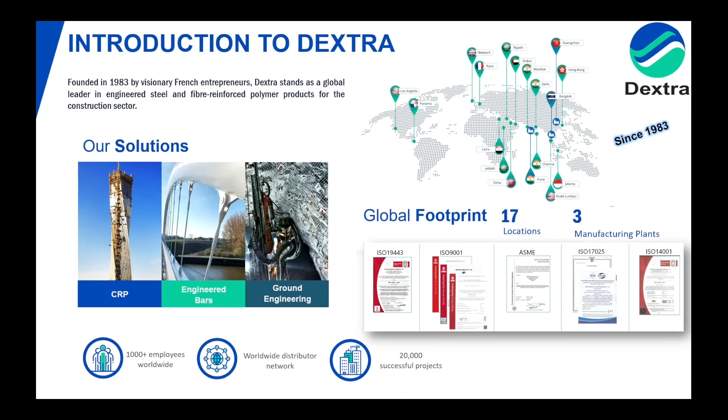years. And the reason I'm saying that steel is not the enemy is also because we manufacture steel products, right? I would be lying if I didn't say so. So yes, we manufacture in China, we manufacture in India. And also one of the misconceptions is that products that are made in Asia are low quality, you can't trust them.

That's not true. We all know now that in Asia, the level of automation in some factories is way beyond what you can find in North America, but vice versa, you find low quality products. So let's get those prejudices out of the way. I will not be using imperial units during this presentation, and I hope that's okay. So I'll be talking about meters and square meters and square kilometers.

So this is 8 million linear meters of FRP produced in China, 3.4 million in India. That was for last year. So one of the mistakes, I think, and we are guilty, as I mentioned this morning with Richard, is that when we initially promoted GFRP as Dextra, we promoted it as something that is temporary, can be cut, and can be disposed of fairly easily. And now we're trying to say that it's the best thing for bridges. So we have to adapt our dialogue a little bit.

The reason is, our first application for GFRP was in the tunneling industry. I don't know how many of you are familiar with the tunneling industry. But when a big machine goes into a station box, breaking in or breaking out, it's going through steel. That's not the way the machine was designed. So this was making people lose quite a bit of time on their project because they had to cut the reinforcement within the concrete before the tunneling machine could break out. So that's not very practical.

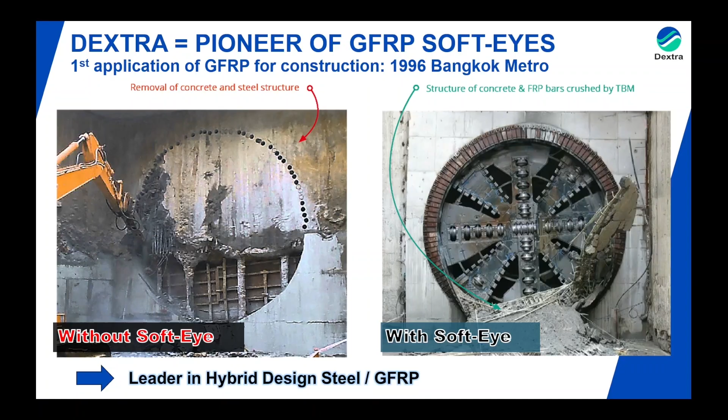Okay, so this is just the way we did it originally, and I'm sorry it's not directly for slabs, but you'll get your slabs later, I promise. The other thing is that we are now using GFRP for additional geotechnical applications. In the geotechnical world, in mining, it's used very commonly, and now we have been using it also with tiebacks, which can be an issue in some cities, having steel strand staying in the ground after the project is completed, and then a micro-tunneling machine or a piling rig arrives, and then it's a disaster.

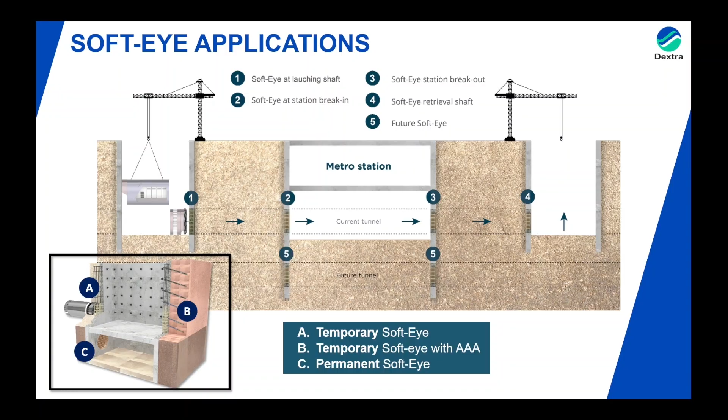And then the liability, and everyone starts pointing fingers at each other. So once again, GFRP can be used for many different things. Okay, we're going to be talking about slabs.

So I am not a slab structural engineer. I got my master's 22 years ago, and I haven't calculated a slab in 22 years. So please, no difficult questions about that.

But before that, okay, so we've seen a lot of comparison GFRP versus steel. So GFRP is not stronger than steel. GFRP has different properties. It has higher tensile strength, but we know that shear forces can be an issue. In seismic environment, we know that given its brittle and non-ductile properties, we cannot be using it there.

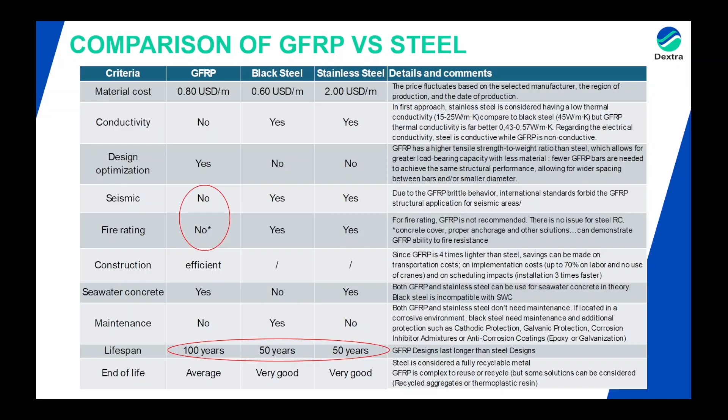manufacturing sheds. But this is a very big push for the Kingdom of Saudi Arabia to get more and more tech companies, to get energy, to get greener, to get a lot of people coming, and they're building using GFRP for the reason I'm going to be highlighting later.

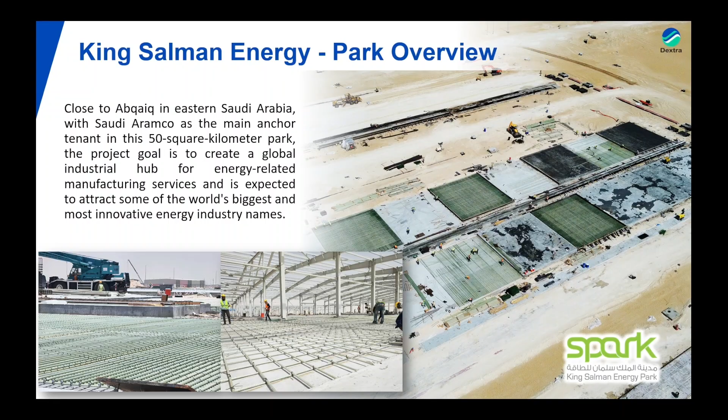So when we say change is painful. Whenever we want to convince an owner, we usually have to convince about 9, 10 people, depending on how many engineers are on the site, and it only takes one person to say no for things to go to waste. So we have to make sure that we talk the language of every different stakeholder to make sure they understand the advantages of the product, and not saying, "Oh, it's greener." No, I mean that's what is interesting for you, and how I'm going to push for it.

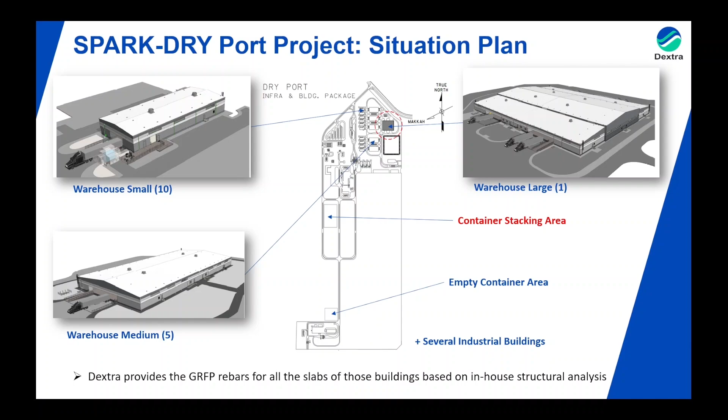So these were the different areas of the project. So most of the areas were within, like in warehouses, and so the loads were not that high, but there was a big area that was outside. The container stacking area where big forklifts and a crane on rails would be installed. So originally the design was with epoxy coated rebar, grade 80, and you can see the loads applied to this slab.

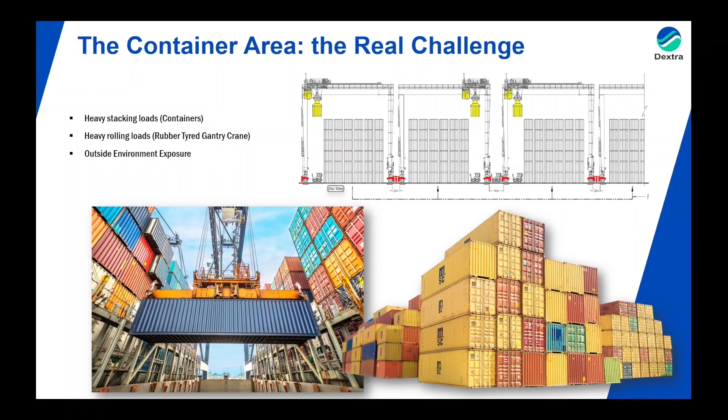So this is, I don't know who, Jim this morning was saying, is this a structural slab? Yes, this is a structural slab. I'm going to be talking about what we did to convince the client.

So the first thing is that we were involved very early on with the owner to talk about how much would it cost the owner to maintain the project once the contractor is gone. And that's something that the contractor doesn't care about, or the engineer doesn't care about that much, but the owner cares about it a lot. So having this conversation very early on with the owner would pave the way for the owner to push the engineer, and the engineer to push the contractor or work with the contractor.

So the owner is a key component of this, because this speaks to the owner. Like, in how many years would I have to maintain, and what type of maintenance would I have to do?

In lead time, in that case, well, we produce 3 million linear meters in a little over 4 weeks, plus shipping from China. So that's a lot. That's a lot of production. We actually set up a factory now in Saudi Arabia. Once again, with steel, you might not have availability of the product. In that case, one of the advantages is that you can build a pultrusion line relatively easily.

Don't look at me like this, Bernard.

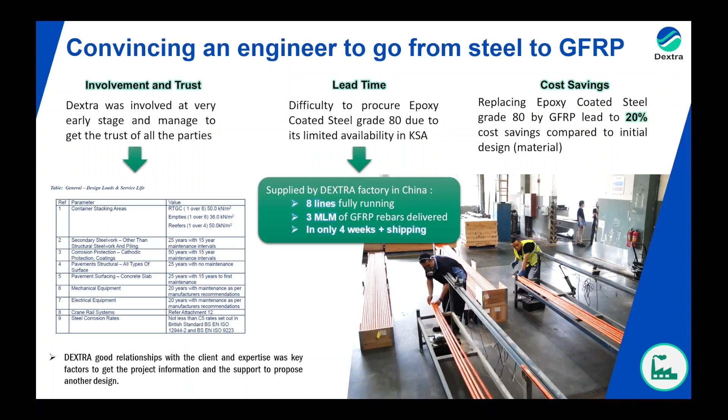Compared to a steel mill. Again, in terms of cost savings, and I'm just talking about the pure material cost savings, that doesn't factor in the labor saving that we've been discussing today. Roughly, this was the overall saving. Once again, it's not a one-to-one saving. Obviously, you'll see later the amount of GFRP rebar and the case studies and the load cases, so it's not something that you can take and say, I'm going to save 20%. It's project by project.

Criteria. So we played a lot with, you said rainbow colors, you like rainbow colors. We also like to play with rainbow colors. You can't imagine on a container stacking area how many load cases you can have, depending on where the forklift is, where he's stacking the container, and where he is at any given time. So thankfully, computers and not manual calculation are now available. So we made our own finite element analysis.

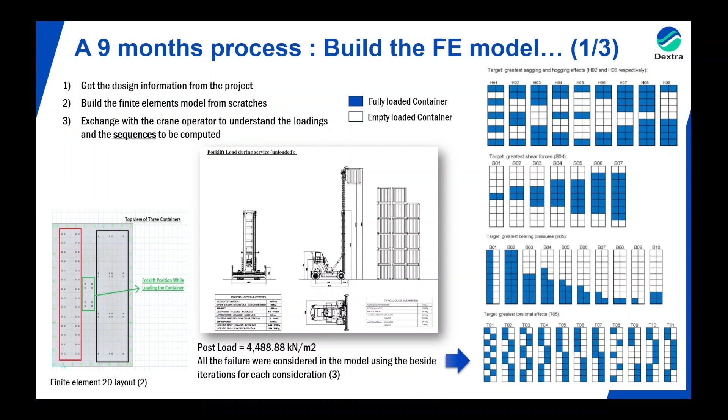That's something also that we can encourage, because it's still new for some people: having engineering capabilities within the GFRP fabricators and manufacturers is critical, so we can help the designers. Because change is painful, and if an engineer has never seen it, well, as Richard was saying, what is this? The same reaction as the contractor on the field, the engineer will have it. So having engineering capabilities in-house helps a lot having this conversation, so they don't think we're just trying to sell them, I don't know, a carpet or a curtain or something.

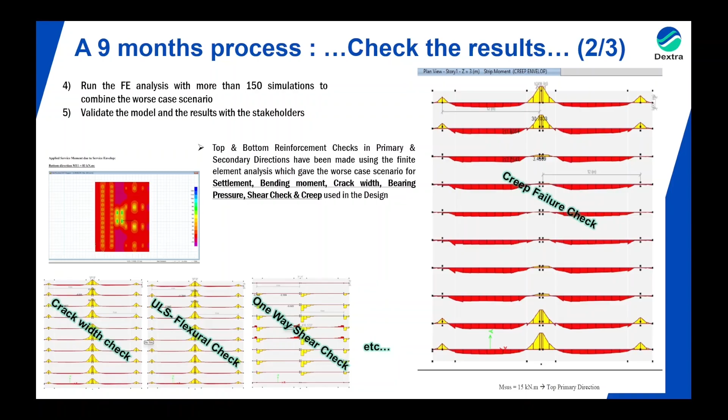So this was checked with more than 150 simulations with settlement, bending moment, crack width, bearing pressure, shear, creep, etc. We spent about 9 months running all the analysis. So that's one of the problems, when you want to change something, you say, no, I cannot change my design, it's too late. So that's why, once again, getting in early with the owner was key in that case.

This is what we ended up with. So a big slab, that's 350 millimeters. So that's over a foot. And that is number 6 bar, grade 45 in that case. And we did the calculation, the engineer approved it, and we made it using the guidance and the guidelines available to us today in 440.

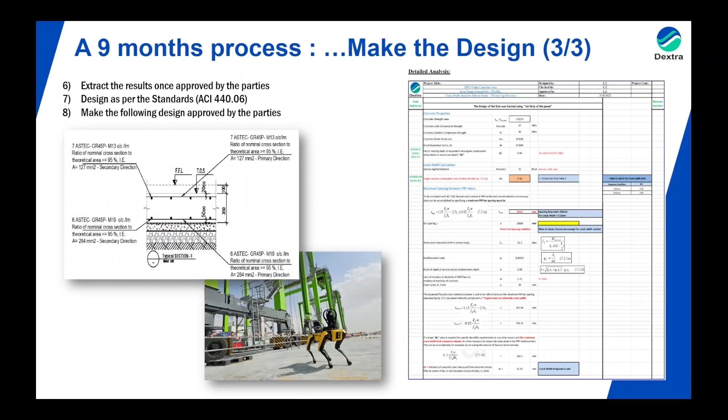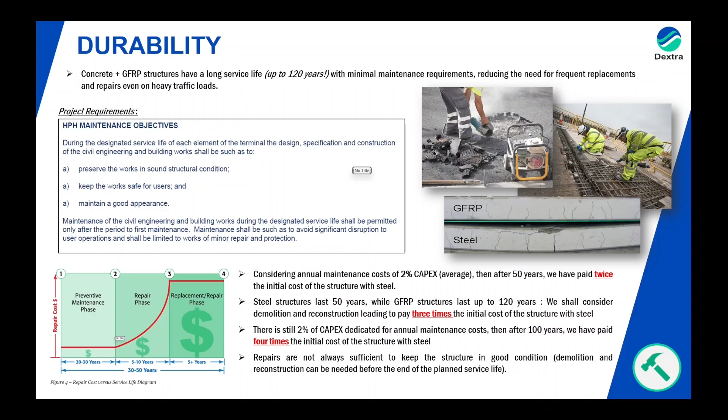Okay, durability. Yes, well, this again is a no-brainer. If you have to replace a structure, in that case there were tight requirements in the project in terms of how much the owner was willing to spend for maintenance, and getting that conversation with him went a long way. I'll let you read some of the capex and some of the future expenditure that the owner will have to ensure. That doesn't take into consideration if the operations of the container stacking area have to stop. That is where the money goes away. So once again, having those conversations, showing the owner what he can save, was critical. Again, we all know that.

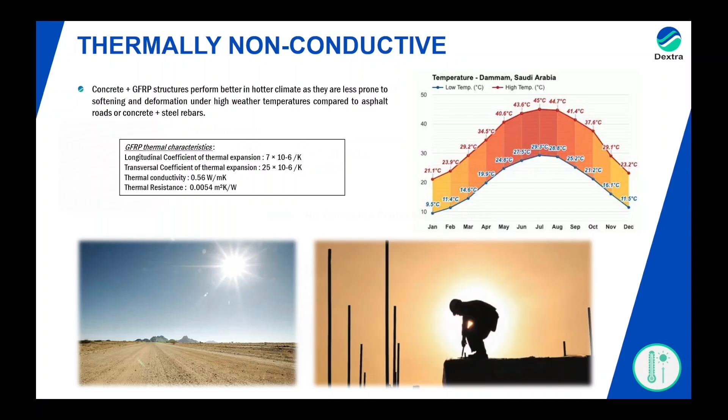I'm not going to do the marketing thing about non-conductive. We know those properties, but the one I want to go over is, yeah, again, durability, right? Are there studies? So we ran our own studies, and again, if fabricators, manufacturers, engineering, and universities can start having more and more data, the more data we have, the more we can challenge the status quo, and some of those code requirements that we know are outdated and are not what we need today.

So in this case, we did experiments and extrapolated to 5,000 hours. We only did the studies for 3 months, and then we extrapolated, and we could see that in alkaline and saline environments, where we tried to reproduce what the concrete pH would do to the bars, we would lose roughly 20% of our tensile properties over the long term, but then we would see an asymptotic behavior in that case.

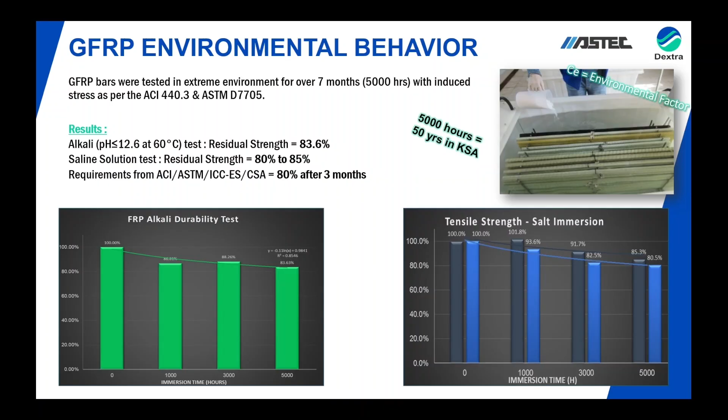So yes, the concrete has an impact on the durability of GFRP, but we just have to make sure that we understand what it is and what is, in that case, the reduction factor.

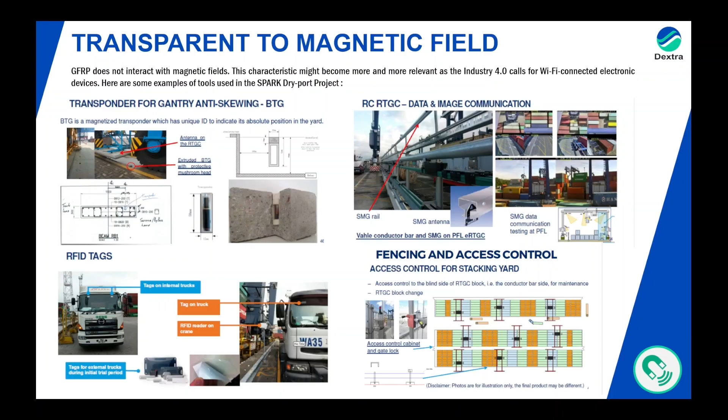Okay, so you don't have to see all this slide, but more and more we live in a world where there are waves everywhere: radar waves, Wi-Fi waves, RFID waves, radio. And the more waves around and the more steel around, the more potential impact on those signals. So you see more and more, in those port and container areas, where you have detection of a truck, where something is scanned, etc. This can be impacted by the cage and the amount of steel in the slab.

Plus, on top of that, it's very difficult to model. Very hard to say today; depending on the spacing of the steel, depending on the cover, depending on where the driver is, you would have an impact that can be very different. So modeling it is very hard. So in that case, GFRP rebar makes a big difference. It's used a lot in hospitals, as we know, because it doesn't interact with the MRI wave. So that's a tool that the engineer can use.

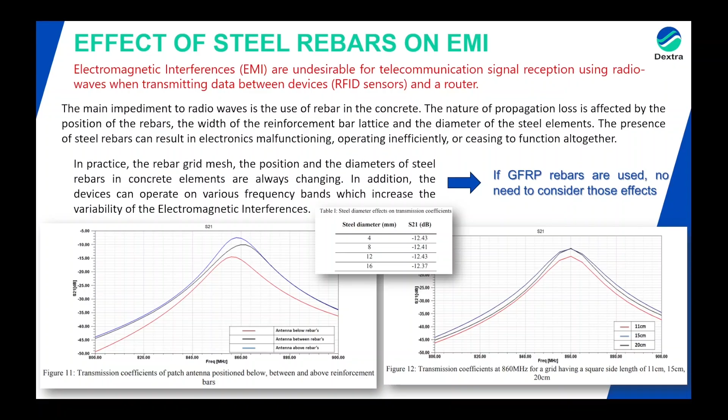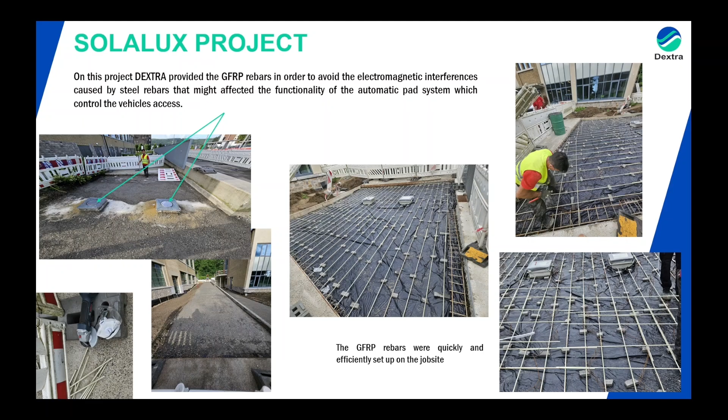And maybe on a building, you would have some steel in some parts and some GFRP in others. Actually, it's very common to do this in the tunneling and geotechnical industry, where in the face you would have GFRP, and sometimes on the crown you would have steel. So that was a project, I think in the UK, where you have those parking things that go up and down. Very annoying, especially when you click the button and it doesn't go down. Well, that was again an application of GFRP for this type of slab.

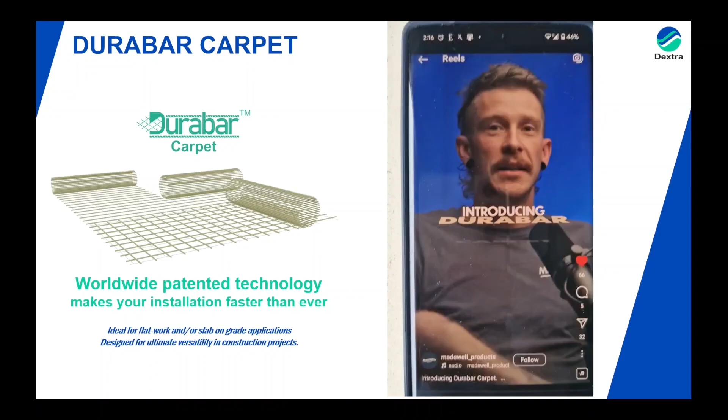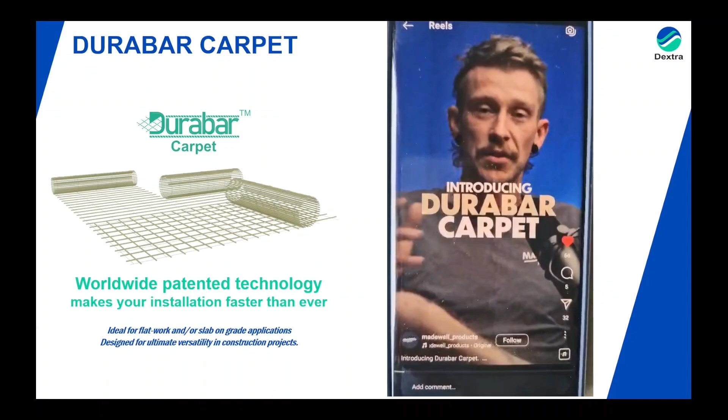Okay, so a couple of things I'm going to show you. I don't want you to look at this one, but we talked about traceability. So I apologize, but I'm not a Gen Z. I tried to download an Instagram video. I don't know if you've tried to do that. It's impossible. So I recorded it with another phone. So that is a testimonial from a client, I hope. Where's the sound? Okay, I'm just going to do something. Oh, no, it's not on. Okay. I'm going to make it a bit higher.

So this is a client of ours in Australia. We were saying how important contractors' feedback is, and how contractors, when they start using this product, they don't go back.

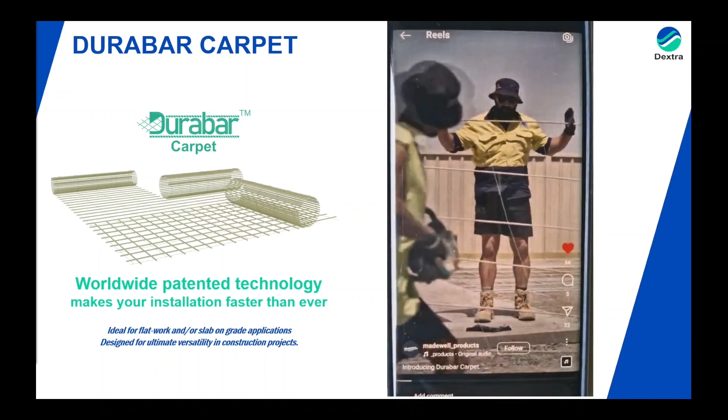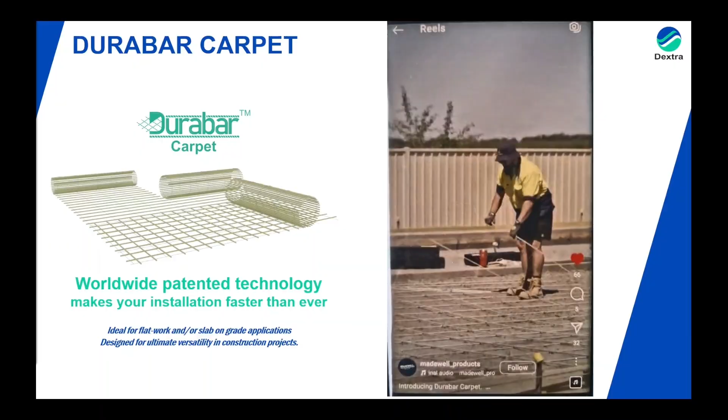So this is a product that we developed last year where we pre-tie the GFRP bars in one direction. So they actually come in bundles.

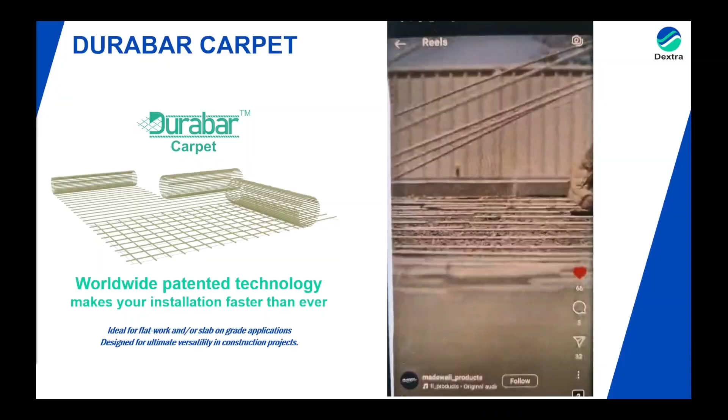It's just all about speeding up the reinforcement process, eliminating wastage of materials. We had about a 25% reduction in labor cost.

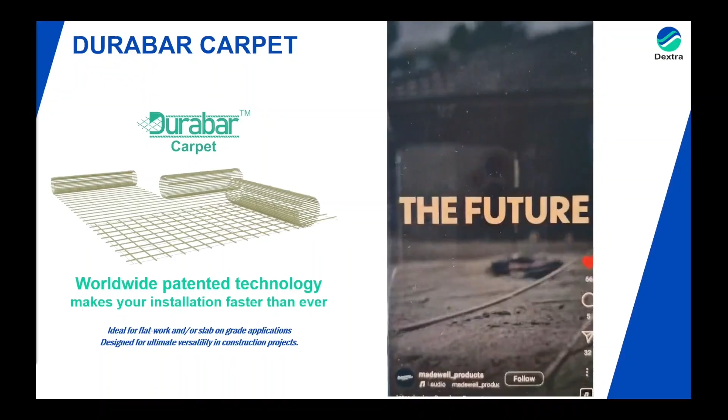Richard, you mentioned 20 to 30% reduction in labor cost. That's the next step in terms of labor savings and how easy it can be to install GFRP bar on a slab, which is a similar application to the mesh that we've seen before. So how do we go the next step to make it even better for contractors to use it? This, again, we're going to talk about in a minute, right? Okay, cool. Also about the carbon savings. And again, this is a very big conversation.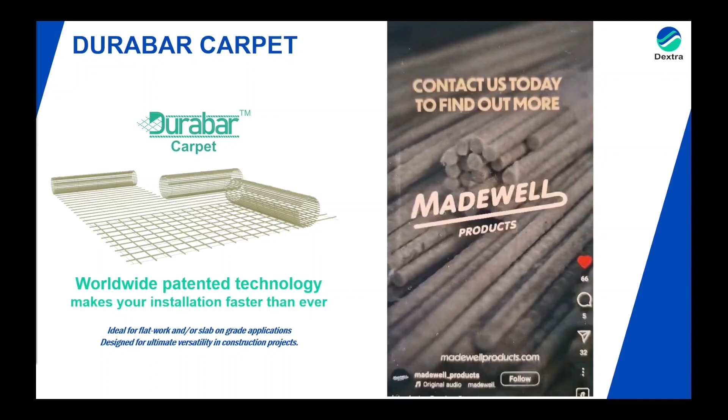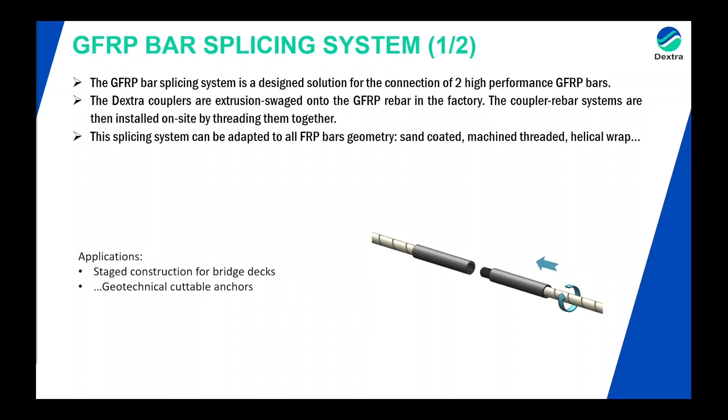So the other thing that we have, talking about the GFRP carpet, it's faster to install in two directions. It's approved; it has an AC 521. Also, coupling two GFRP bars. As far as we know, there's been a lot of work and people trying to come up with a coupler for GFRP bars. Because we understand steel quite a bit, we think we have found a way. Actually, we've been using it. We swage a black steel coupler on the GFRP bar, and then we thread one bar with the other. So I'm going to have to take that phone whenever you...

I'm just kidding. So this product can be used instead. We developed this product for geotechnical anchors because this little coupler here can withstand about 25 tons of tensile strength, which is actually the limiting factor. With the swaging, we lose about 20% of the tensile strength capacity of the bar. But again, for the application we're talking about, it's plenty, because we know that the tensile strength of the GFRP is not usually the deciding factor.

So this product can also be used in stage construction for bridges. If you have a bridge where you have 2 lanes on one side, 2 lanes on the other side, today you have to cut 2 lanes plus something. So traffic-wise, for the user, it's not the best experience. So the applications are multiple, similar to applications for steel couplers.

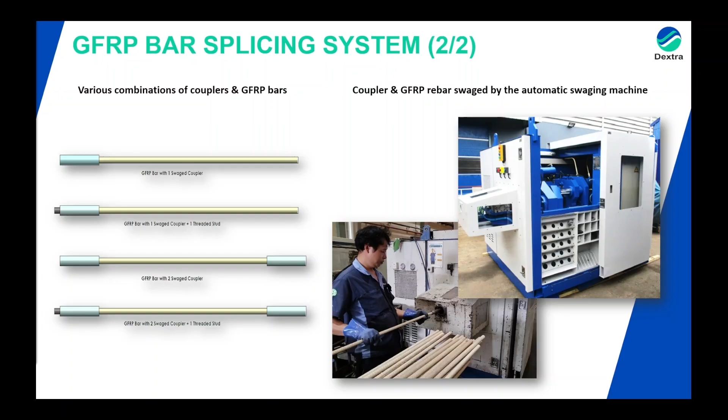And again, we discussed the dowel bars earlier. There was a comment about GFRP cannot be bent, which is one of the, how do you say that, when you have a rock in your shoe and you can't walk. Yeah. Exactly. But the truth is, there's been a lot of progress today, and some resins around the world are being developed, like thermoplastic resins, where you'd be able to bend the bar once you have it. So it is still very early in the technology.

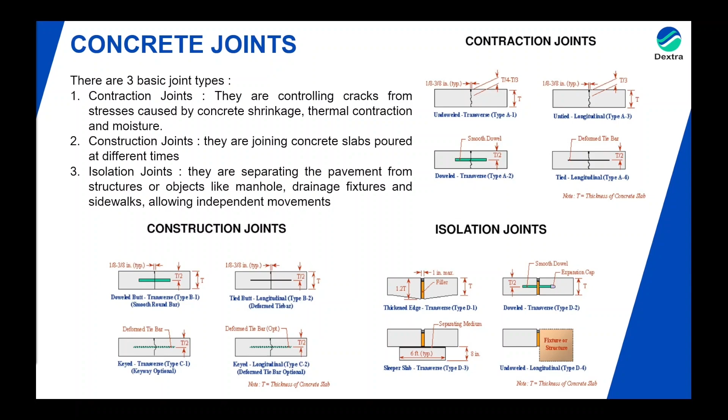It takes a long time, but this will continue to evolve, and tomorrow it will be faster and cheaper to bend GFRP bars, which will take one of the rocks out of our shoes in what we do today. And we'll also involve the rebar fabricator, which today is not involved at all in the cutting and bending because it's done at the factory. So we can understand that the steel people can say, I don't want to use it, what am I going to do with all my people who cut and bend rebar? So if they can cut and bend GFRP, maybe we'll have them on board as well.

Okay, GFRP dowels, we discussed that at length this morning. I'm not going to go over it, but it's another one of the applications.

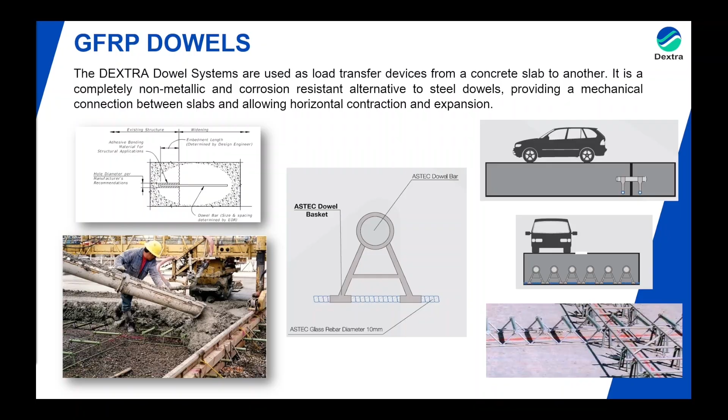Okay, carbon footprint. This is a lie. Okay, I just want to say this before I get questions. The first thing is, how is the steel produced? If it's recycled steel, it's 6 times less carbon footprint for production, again, do you talk per ton or do you talk about equivalent tensile strength? So there's a lot of talk that GFRP is greener. No, GFRP is not greener. It depends what you compare it with. Compared to recycled steel, it's not.

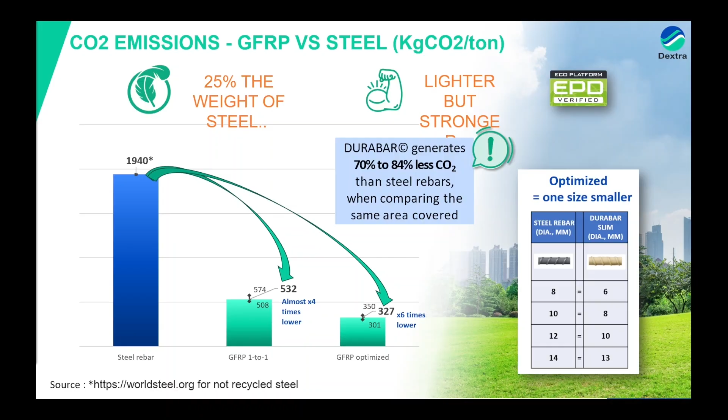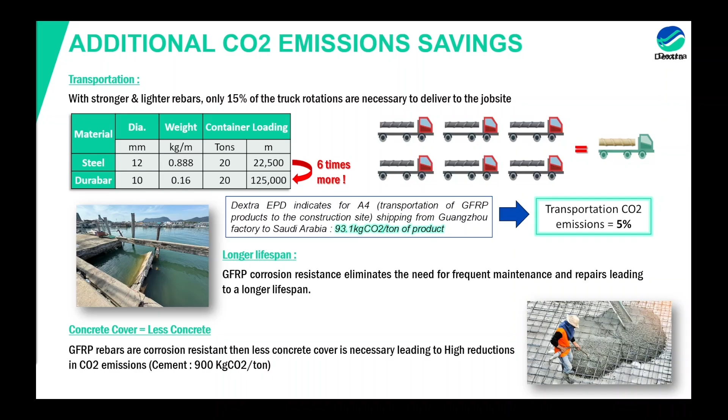However, and that's a big thing, if you add up the cost of transportation, again comparing two bars that have similar properties, without going into too much detail, the added cost of shipping because of the weight of the rebar can make a difference, even with recycled steel. In that case, we are like this one, if you include the Scope 3 emissions. And I encourage all of you to publish your EPDs. I don't know if everyone in the room has their EPDs, but this also goes a long way in terms of transparency, in terms of showing that we are honest.

Another thing that we will see: hopefully my kids, when they see concrete in a few years, they're going to say, what kind of water did you use for this concrete? Fresh water? You put fresh water in concrete, right? With scarcity of water and the problems we have today, there is a committee in the ACI, the 243, that is pushing to use salt water, like seawater, to make concrete. We're not there yet. Obviously, steel would be an issue with regular black steel and salty water. But with GFRP, we are actually studying the impact.

And I think in Florida they already built a bridge with seawater. I'm sure that in a few years, in California and Florida, most of the concrete in regions that have no water and are close to the ocean will be using salt water.